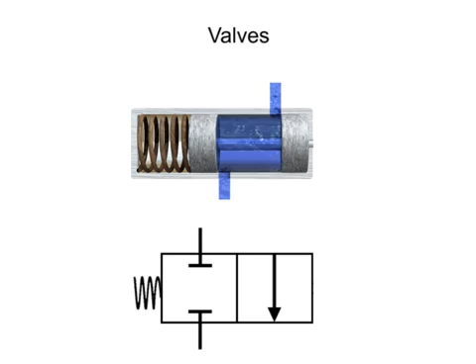In most air and hydraulic fluid power circuits, valves are used to control the direction, rate, and pressure in fluid lines. Control valves for these functions can be purchased with either manual or solenoid actuators. In a manually actuated valve, the internal cylinder is shifted by hand using a lever, push button, plunger, or other manual actuating device. By contrast, valves with a solenoid actuator respond to an electrical signal for shifting.

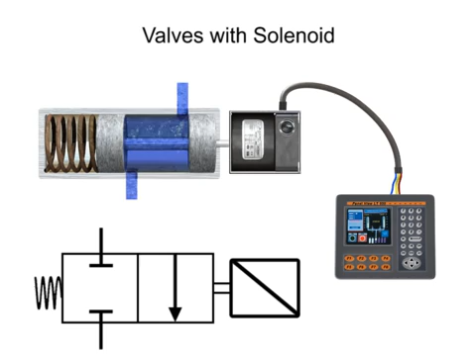With electrical control, machine cycles can be set up for automatic sequencing, and operator control can be exercised from a remote location. Solenoid valves are said to be either direct or pilot operated. A direct operated valve is shown here. A pilot-operated valve has a pilot and bleed orifice and utilizes line pressure for operation. This is a pilot-operated relief valve.

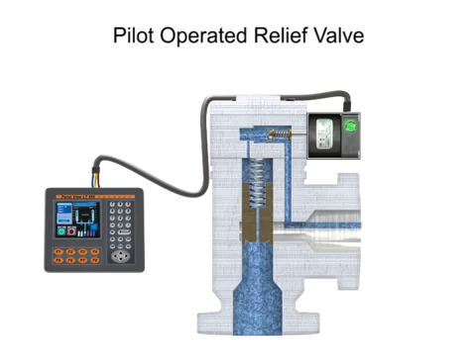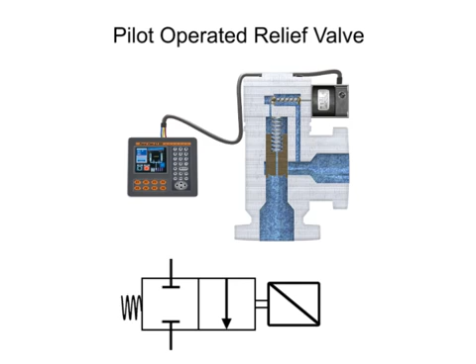When the solenoid is energized, the core opens the pilot orifice and relieves pressure from the top of the valve piston or diaphragm to the outlet side of the valve. This results in an unbalanced pressure, lifting the piston or diaphragm off the main orifice. When the solenoid is de-energized, the pilot orifice is closed and full line pressure is applied to the top of the piston or diaphragm, closing the valve. Most directly operated valves also come in pilot-operated versions and are designated by a triangular graphic symbol.

A single solenoid valve has one solenoid to assist in valve operation. The valve spool shifts when the solenoid receives an electrical signal and is energized. The valve will remain shifted as long as electrical current is applied to the solenoid. Once the electrical current is removed and the solenoid is de-energized, the valve returns to its normal position by spring force. Fluid circuits designed to use single solenoid valves must maintain electrical current in order to keep the valve in its shifted position.

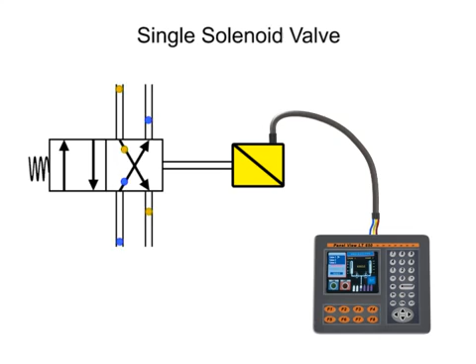Double solenoid valves have two solenoids, typically mounted on opposite ends of the valve body. This type of two-position double solenoid valve does not have a spring return. When the first solenoid is energized, the valve spool shifts into the first position. Even if the first solenoid is de-energized, the spool remains shifted. This is because there is no spring to return the spool to its original position. Energizing the second solenoid will send the valve to the second position. Even if the second solenoid is de-energized, the valve will remain shifted until the first solenoid is re-energized.

Since there is nothing holding the valve in the shifted position other than friction, these types of valves should be mounted horizontally to avoid self-shift due to excessive airflow or vibration. If both solenoids are energized at the same time, the solenoids will work against each other and may cause the spool to become stuck, electrical burnout of the solenoid, or an overload of inrush current to the circuit, any of which will cause severe damage to the system or valve.

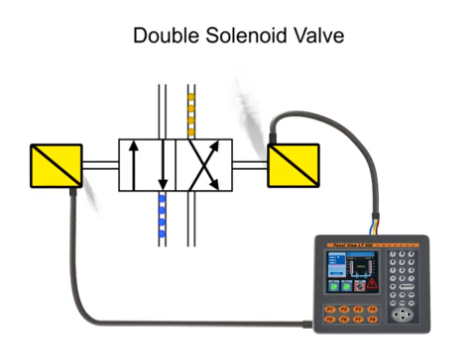A three-position valve has a spring-centered neutral position for its internal spool. Because of the centering springs, it's necessary to hold current on one solenoid or the other to keep the spool in one of its side positions. When each solenoid is energized, the valve shifts to the appropriate position. Anytime both solenoids are de-energized, the valve spool will spring to center and stop the fluid flow. Therefore, a three-position valve requires a maintained electrical signal for its operation.

As before, energizing both solenoids at once may cause damage to the valve or to the system. To prevent this from occurring, electrical circuits should be designed to make it impossible to have current on both solenoids at the same time.

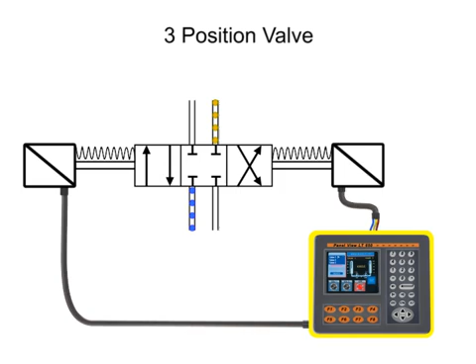Solenoid valves are used in both hydraulic fluid and air systems to control direction on cylinders, deceleration or speed control, and pump unloading or pressure control. The physical appearance of each component will vary greatly depending on brand, size, and type, so care should be taken to reference the appropriate manufacturer's guidance when choosing a solenoid valve.